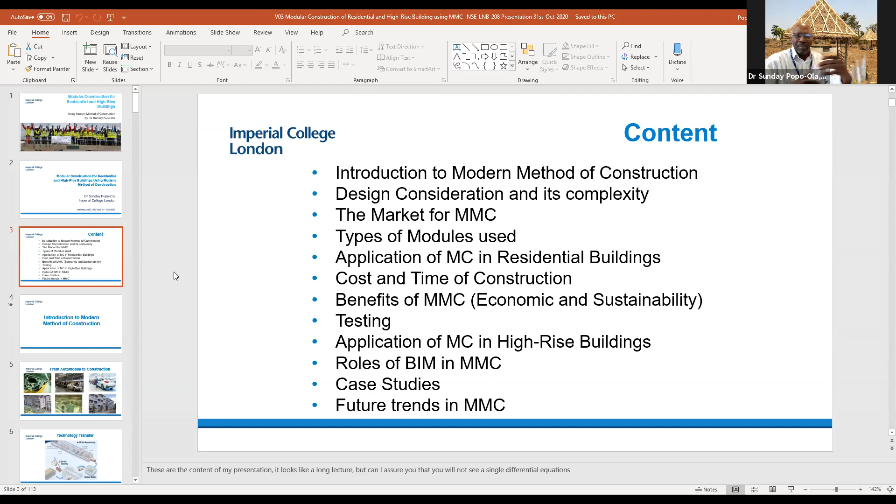As I've said, everything I've shown here, we don't just talk the talk, we walk the walk. I'm going to show you 3 or 4 case studies of where we've applied MMC to the work we've done, and then take you on a journey of where we need to see this in future - how MMC needs to grow to make sure we all benefit from it.

Take, for example, you want to buy a car.

Actually, MMC is not new. It's been used in other industries like the aeronautic industry and automobile industry. You want to buy a car, you don't go to Makola market to buy the tire, and you don't go to Computer Village to buy the dashboard. You go into the car show, you test it, you test drive it, and if it's what you want, you drive it away, and that's your car.

Why can't we get the construction industry into the same way? Why can't we build a factory and put all our modules, all our rooms, kitchen, everything into the factory, and then transport it to site, and by the time you know, a whole building is ready to go. Yeah, so that's what modern method of construction is all about.

We more or less transferred it from other engineering professions. So this is what I'm talking about. You come into the factory with all your raw materials. Normally, our raw materials go onto site. We bring them into the factory, and we do things to them. We cut them up, we put them into 2D panels, whatever. This is typical for housing.

And then we change them into 3D modules, and then they go on the back of the lorry - I don't like that word, but that's the word we use - and by the time you know, the building's been arranged on site. And if the site is not ready, you could actually store it in a place for a while, and then, just in time, transport to site. So that's what the technology is all about.

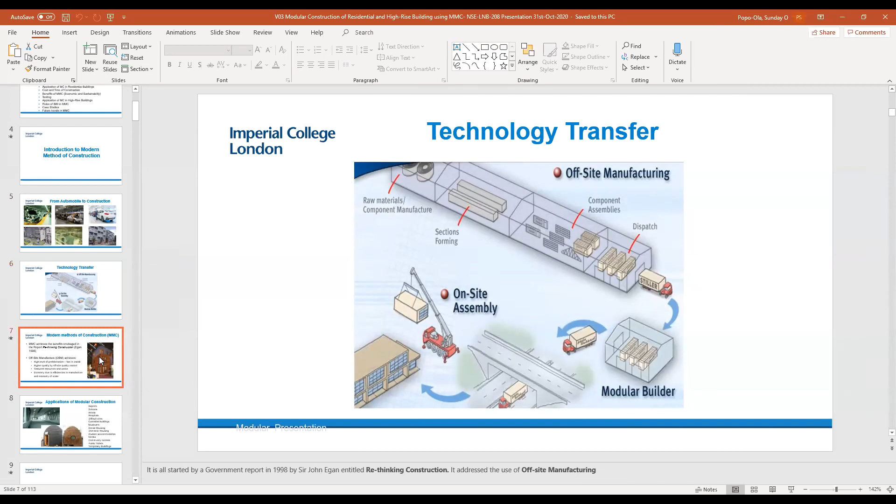And it all started many years ago, in 1998, when the UK government said to themselves, wait a minute, engineering and construction has been around for so long, but nothing has changed. We're still mixing mortar and block on site, we're still doing all this wet construction. Why can't we look at rethinking construction? And an elderly man called Sir John Egan was commissioned, and he set up a team. I did a lot of work for that team also, looking at rethinking construction.

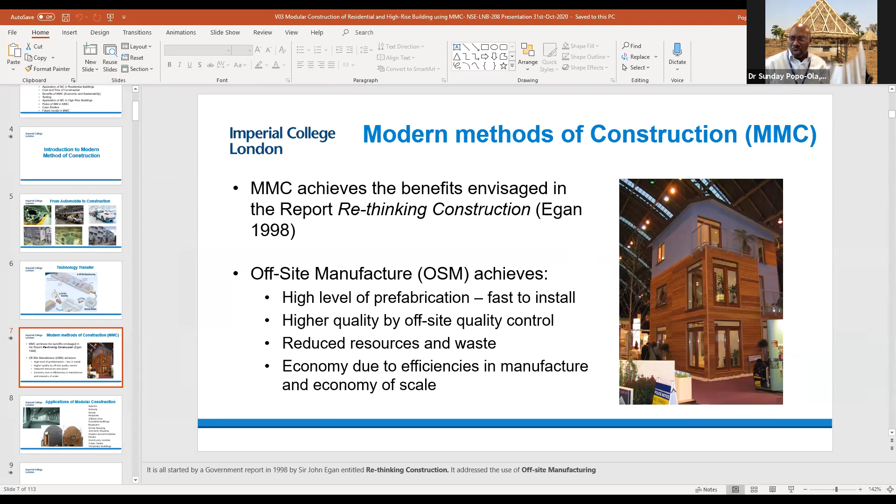And some of the things they came up with is, let's look at off-site manufacturing. Let's learn from the automobile industry, learn from the aeronautic industry, and see how we could put that into the construction industry. So: high level of prefabrication, fast to install, high quality of off-site control, reduced resources and waste, economy due to efficiency in manufacturing, and then capture this economy of scale. You have a factory building 50 cars, the same factory could be building 10,000 cars - you don't need anything more than that, you just need to work harder, spend more time, employ more people. Yeah, so that's the basis of modern method of construction, started from that report.

Design-wise, the size of the component is very important. When you're doing a build on site, as soon as the architect gives you the drawing, you don't worry about the design, about the size - you build whatever the architect gives you to do. With modern method of modular construction, you have to worry about the size of those components to make sure they fit in the factory, they fit on the lorry, and they have access to site.

The weight is also very important because you're going to transport this on the lorry, so you have to make sure it's not too heavy for that, and also for the lifting crane that's going to locate it. Accuracy is most important - I will show you a case study later on where accuracy tolerance was not considered properly, and the building had to stop after going to about 10, 15 stories. They had to stop, take everything down, and start again.

Time for erection - you have to plan that to make sure the foundation is ready before the modules start to arrive on site. The connection between the modules, and between the module and the core that's going to take all the lateral load. Health and safety, amazing - in this kind of construction we have a lot of free edge working at height, and health and safety is very important. One life lost is important to the construction industry.

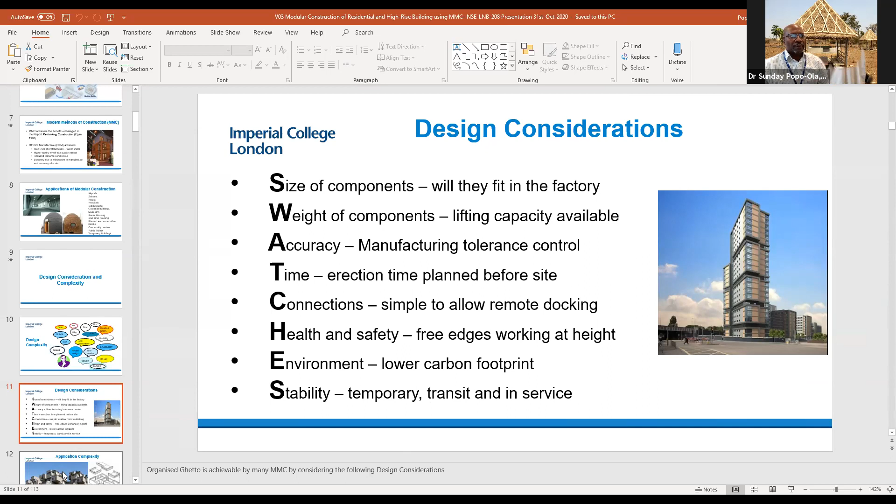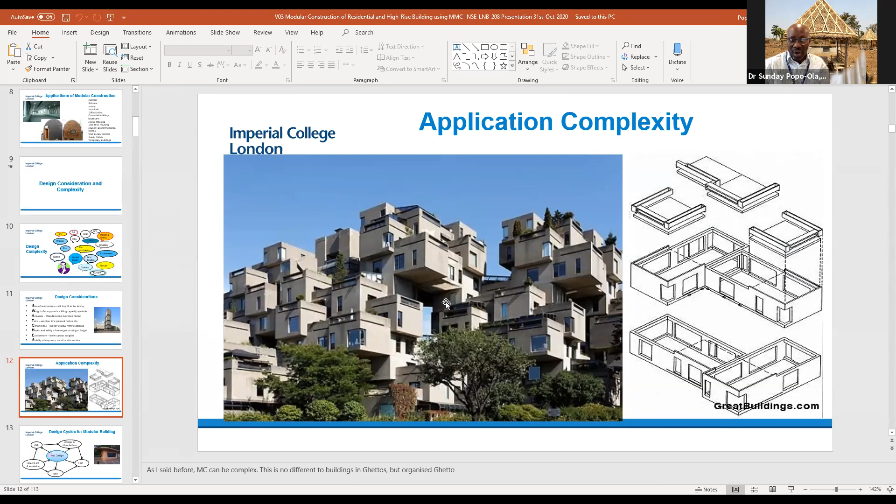Right, complexity - you could see the building there. It looked like one of those ghetto buildings in our local village, or even in Brazil and Mexico, all these buildings that have no order, no shape, they just put them together and they're functional. But this one, although it looks ghetto-ish, believe me it's very, very functional. It works - that's all modular blocks arranged in such a nice, fancy, complex way, and everybody is able to get into their building. That simplifies it. This is where modular comes in here.

So you take a pod, look at the design of it. How much is it going to cost? How long is it going to take to design it? How are we going to get it onto site? And who is going to use it or reuse it? After this one is used like a cafe that you could stop at in the park and get a drink or a little sandwich, whatever - but after that, can it be used somewhere else? These are all the things you need to consider. So that's just a little introduction to the complexity of the design using modular construction.

And why modular? Why can't we do things the way we've been doing before? As Einstein said, people are insane if they keep doing the same thing and expect a change. We cannot continue to do the same thing - things are moving on. So what's the market?

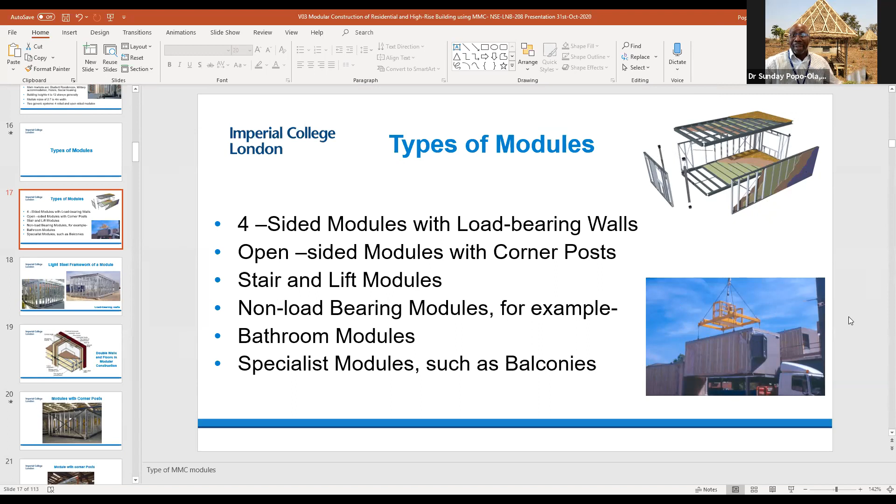Or you could have a staircase module, which is done again in the factory and transported to site. Or you could have a complete module, which has all been completed in the factory with load-bearing walls, load-bearing columns and beams. And then you could have a specialized module for balconies and things like that - I will show you a bit more about it as we go.

And in this light steel, they used to use them just for purlins, roof purlins, 30, 40 years ago - they had no other application for them. And then they realized, wait a minute, these guys are so strong, so reliable, so durable, we could use them for other things.

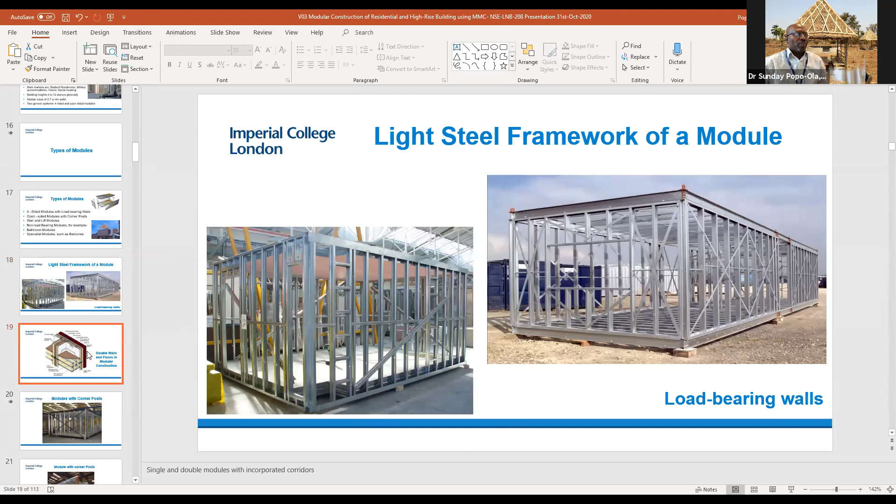One of the things people say about modular or MMC is that it's a bit of a waste of material. You can see here, this is a corner of a module, which has its floor, its roof panel, and its wall to the external, and then a wall to the next module. Then you have another module here, which has got its own wall again.

Although in a traditional method, you would not have two walls put together, it would just be one single wall. But believe me, the advantage you get from it far outweighs the cost and the material used. Because with this, it helps improve the sound insulation between the rooms, between the floors, the loss of heat to the external, as well as vibration.

So you can imagine people having a party here, and if you only have this one level, the people below will feel the vibration. So these are all the advantages of such a system.

And you have modules where it's got corners. So this guy here, they just have infill panels. They actually structurally do nothing. They're just there to fill the space and demarcate the space from this one to the next one.

So the working guys there are the column, the beam, and the brace member, just like a box. They're doing their work to make sure, like you all know, when you have a window or a rectangular pane, if you don't put the bracing in between, it won't transfer the load properly, and it won't be effective. So that's that there.

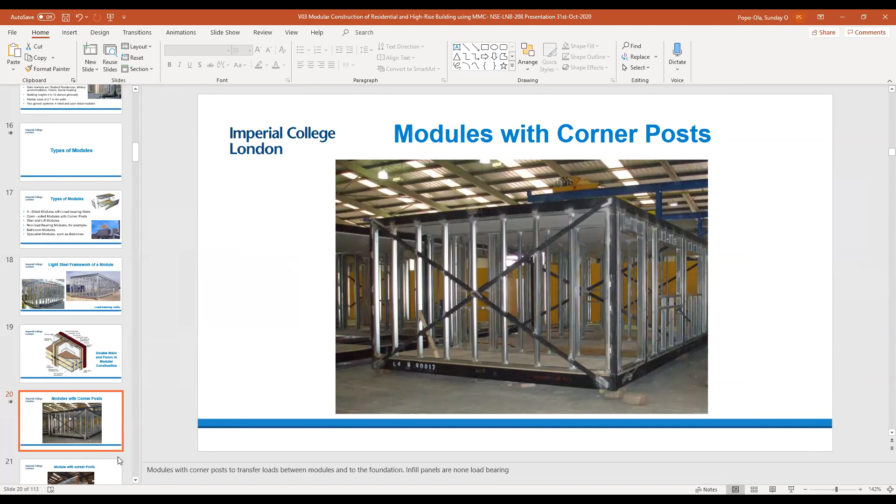And then you have some where you need to create a bigger room, so you can't have any wall on the side. Assuming this is a classroom and you have three of these together, the one in the middle will not have any walls in between because you want it open to the next one. So you could have that too, but the design of this is very, very important.

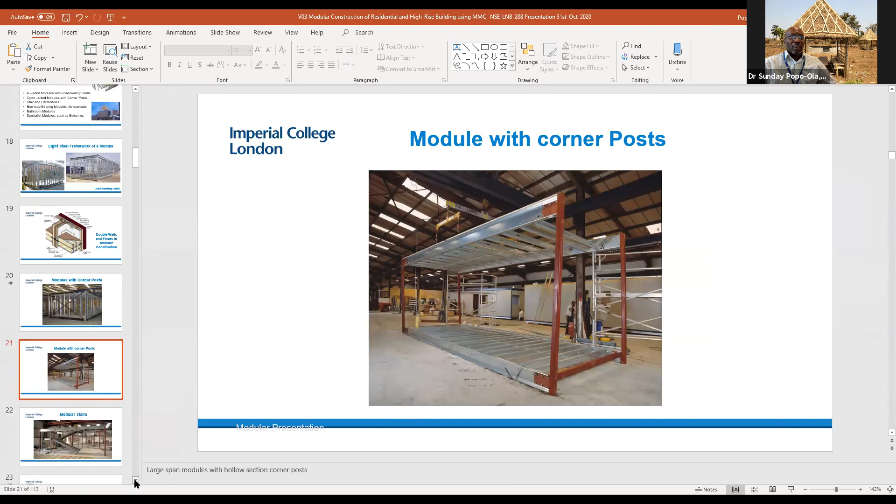And then you have some where you incorporate the staircase. Staircases are very, very funny elements in modular construction. It's not something you just put the timber mold in and cast the staircase on site.

You have to really, really plan this, because the next module is coming on top, and it's got its own floor as well, and this has got its roof. So the treads and risers of the staircase need to be planned to make sure they don't clash at that level.

Right, let's move on to application in residential. This is amazing. This started many years ago by a group of

A commercial or housing association called Peabody Trust came to us and said, listen, there's a lot of demand for housing in London, in the UK generally, but the rate of building is not fast enough, how can we deliver this? Based on Egan's report I showed you earlier, they put a factory together with Yorkon, the factory manufacturer at the time. Peabody are just the housing association, they provide housing for low-income people and all kinds of things.

So they put the money where their mouth is, and we created this apartment very close to central London, in a place called Angel, for those of you who know London well. And we were trying to maximize all the recommendations in Egan's report.

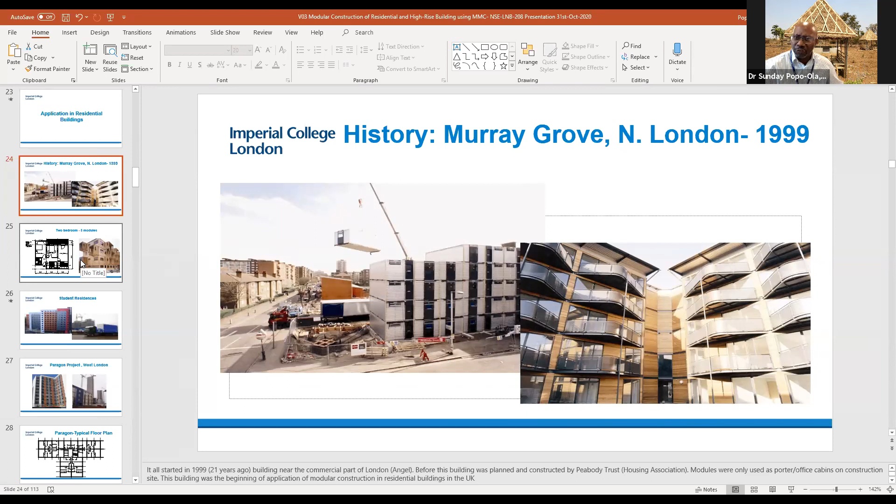And this is the inside of it. Looking inside, you definitely won't think these are made of boxes attached to each other. It's beautiful inside. And that set up a lot of people saying, wow, if you can achieve this, then we need to work a bit harder and achieve more. Then you have the timber people also coming along and doing their own thing.

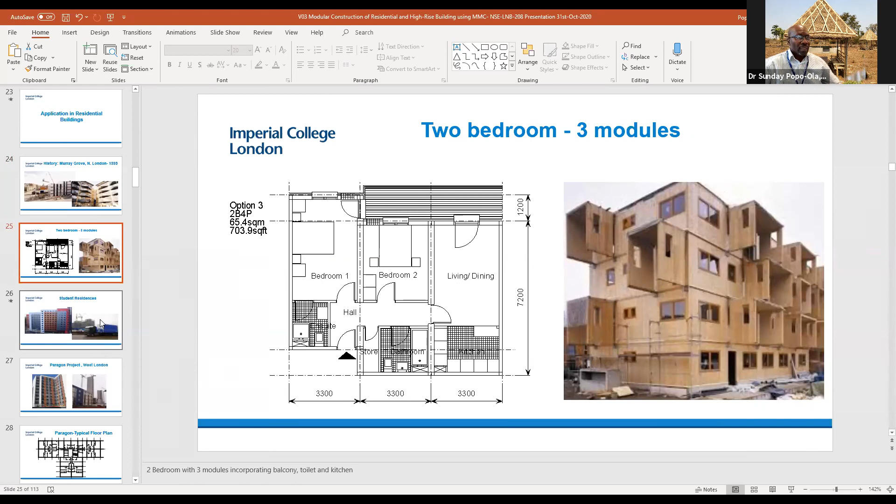So this is a typical 2-bedroom house, and all you need is 3 modules. There's one module here which incorporates the balcony. There's another module here which incorporates the kitchen and the bathroom or storeroom. And then the last module, again, another bedroom and the toilets and baths. So everything could be incorporated within the module, and they just come onto site and fit it together, with a door flowing through all 3 modules. And then with that, you go up and start applying it.

So this is a company called Unite. They realized there's a niche for student accommodation—an amazing niche for it. I don't know about now that we have Corona with us, most students are working from home now. So they saw that and started building student accommodation everywhere. The big thing about Unite is they're not just manufacturing the module, they also have a contracting arm of their company. So they manufacture the module and then pass it on to their own contractor to build the building.

This is about a 12-story student accommodation, the one I showed you earlier. It's called Paragon, we did a lot of fantastic work here. This was done by a modular company in Ireland. They put this project together, and you could see the concrete core already on site rise, boom, 12, 13 stories. Before the module starts to arrive, the concrete core is already there. And this is a typical plan for that particular building.

And you could just see the line of the modules right here—that's the lines of the module, where all those lines are. And these are the modules which incorporate the corridor, one room on the right, one room on the left, and the corridor in between. And this is typical of the module being lifted onto site. You could see, I think I showed the skeleton of this module earlier.

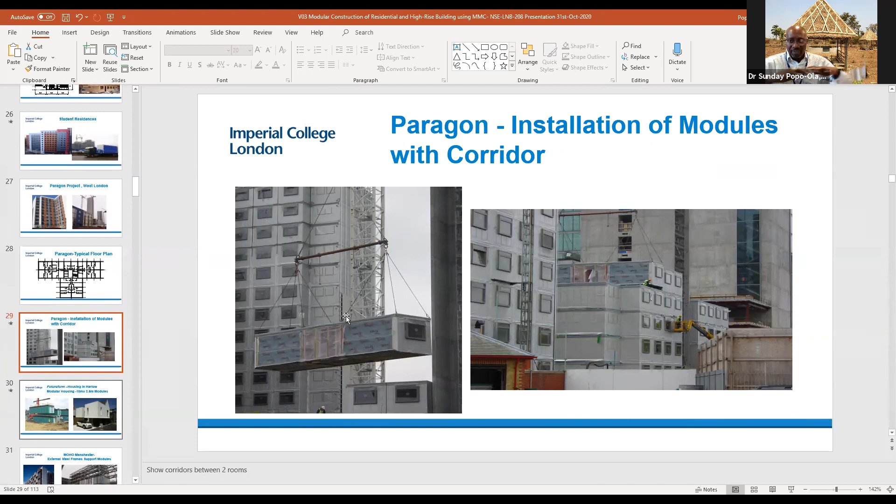Now the window is being put on, some of the facade element is being put on, and it's being lifted. Lifting is also very important—you have to think of the wind load and the rain and all kinds of things going on to the side before you lift, and you have to make sure you lift in such a way that the module doesn't get damaged. So you can see this one has an 8-point lifting point on this module to make sure it keeps flat and lifts very equally.

And who says modular construction is just boxes? This is a private house somewhere in Harlow, in West London. And although it comes in boxes as you could see here, by the time it finishes, amazing, amazing, good looking with a nice car, and nobody will be able to tell that this is made of those boxes.

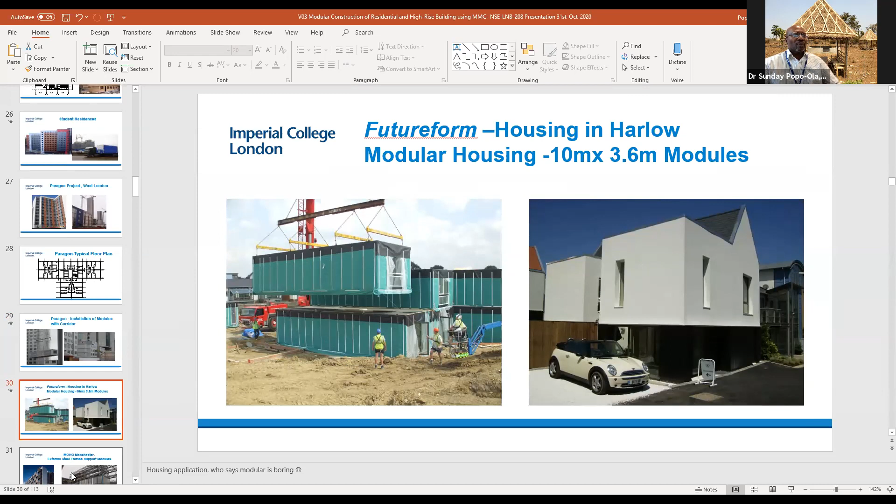And then you have some more where you have what I call plug and play. I always argue with architects and engineers that it's a little bit of a waste of materials there. You have your steel structures already in there, and you just bring your module and plug them in—plug and play. It's an experimental design that we tried. It worked, but I think not many people have tried that for a while now because of this double handling of materials. You have a steel there, you have a column, you have a beam, and then you have the same thing on the module itself.

And then application in schools—this is a big thing because in the year 2005 to 2010, the UK government decided to rebuild all secondary schools and build new ones they call academy colleges, like technical schools in Nigeria. And to be able to build them fast and efficient, they have to use this method. So a lot of these schools we worked on used modern methods, using prefabrication, using the modular method. And some of these schools could go up within a week because everything is done off-site.

You just come to site and attach them together. While they're building offsite, the foundation is being prepared. And the foundation is also very, very little. It's not very big at all.

And then you have other applications, like this one in East London, where the ground floor is made of steel structures, and then the modules are assembled on top of it. These two structures there are a lift core or staircase to resist wind load.

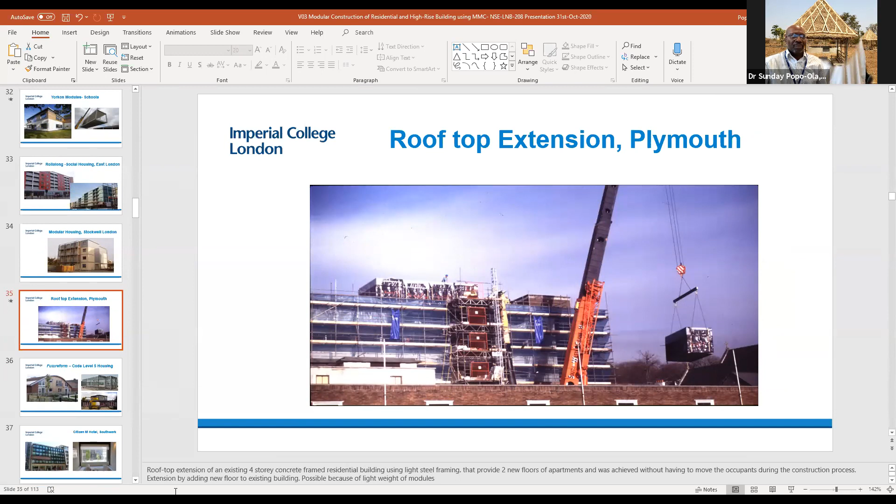Again, more of this plug and play, as I said earlier, where the kitchen as well as the bathroom module come in 3D, while everything else comes in 2D panels and is assembled on site. Some people use this especially when the site constraint is so bad you can't get a big lorry onto the site - so you bring the members in 2D panels and quickly put them together. But the smaller modules, like the kitchen and toilet, could come in 3D. Each time you get to the floor area, you put the next one on. So again, it's a quick way of building.

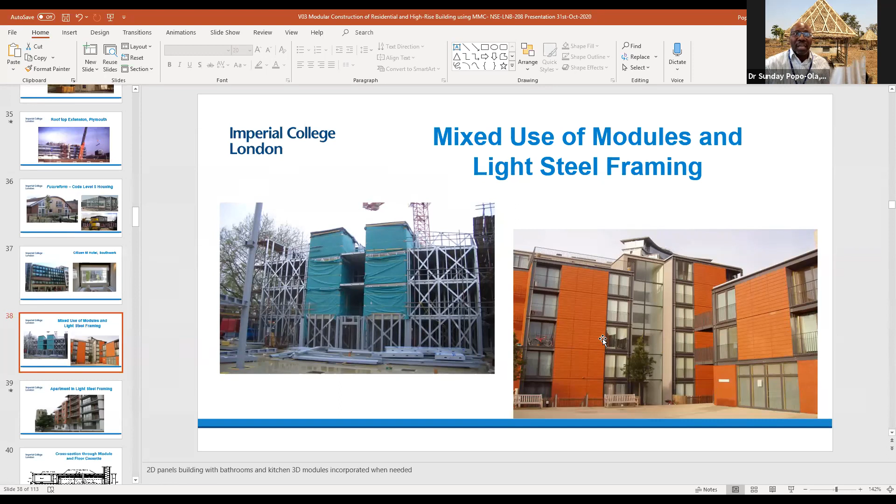This is what's finished at the end - this is the same building, and this is what it looks like when it's finished. And again, in apartments, the same thing - you could either have a module put together, or you could have a 2D panel put together. But when you're looking at them at the end, you'd think these things are done by traditional methods, and they go up so fast you won't believe it.

You see the land one day with nothing, and within a week or two, the whole building is done. People thought, what's going on there? Is this magic or what? But that's it, that's what we're doing at the moment.

And I told you earlier, the use of material is very important in these things, because these materials are very tiny in thickness - 1 millimeter, 2 millimeters, 1.6 millimeters in the floor system, and then another one which is 2 millimeters. They're very thin compared to thick concrete or thick timber, 2 inch, 3 inch timber. And the way you connect them together makes them look so efficient.

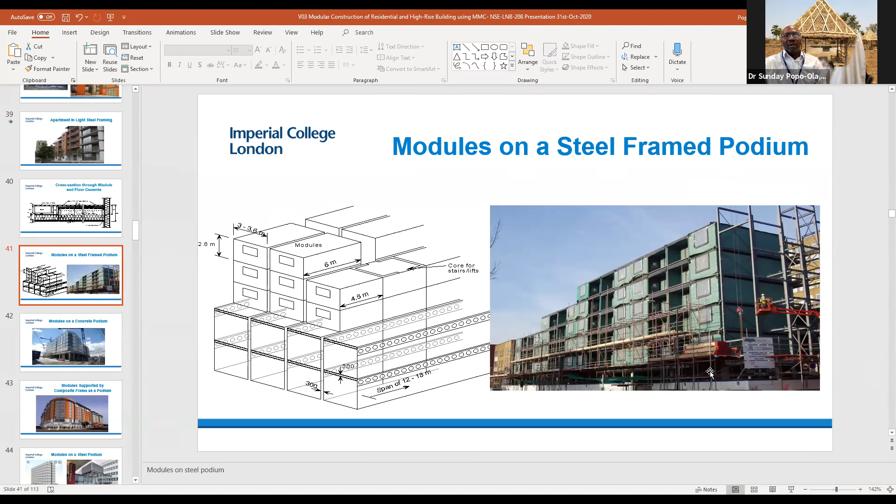They work very, very well. This is the same building I showed you earlier, showing how the ground floor is made of hot rolled steel section and then the module on top. This particular one was done in Manchester. This is a student accommodation. It was massive, like a rectangular shape with a big courtyard in the middle.

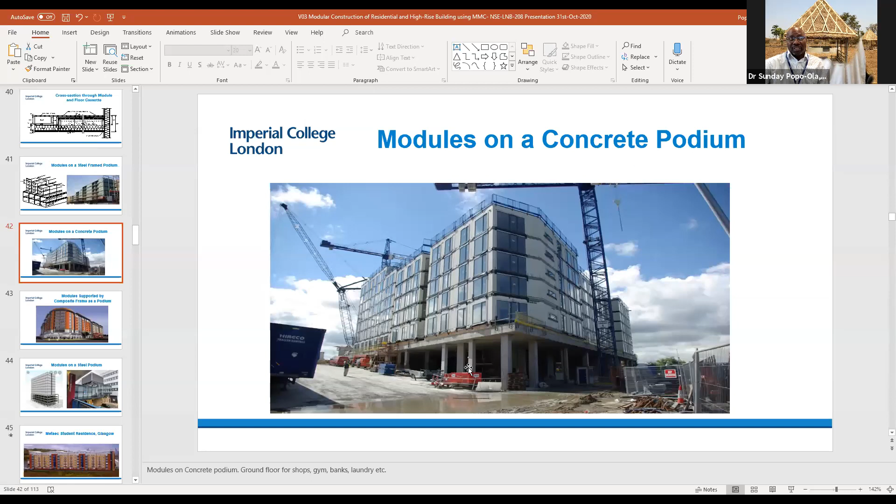Right, how much does it cost? Well, I've described some timing and things like that with you just now, but time and cost is very important to construction. So we need to review this, and it's not just cost, it's a whole life cost. Modular construction is so fantastic that there is hardly any callback within a year or two. Most traditional building, within 6 months, something is leaking, a pipe is busted or something happened and they have to come back. With modular, everything is tested off-site to make sure it's all working.

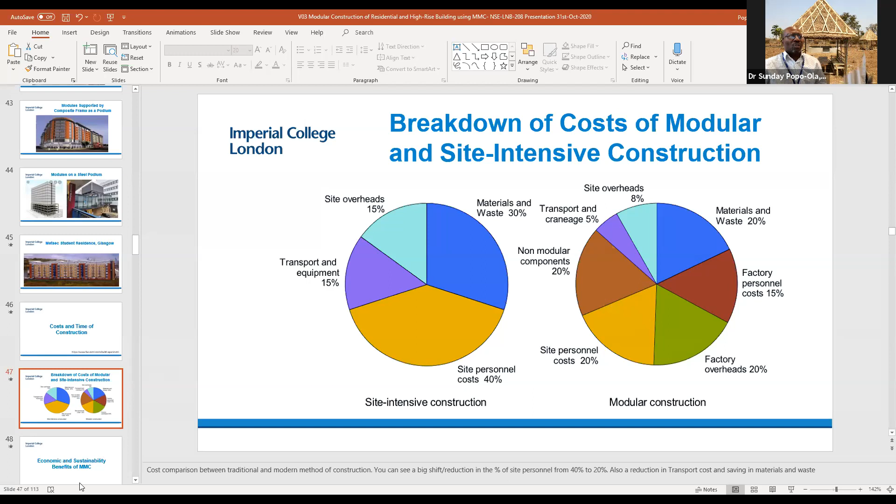Now, let's look at the economic and sustainable benefit of modern method of construction. Some of these figures I'm going to be giving you here didn't just pop out of the air. We've done a lot of research over time to come up with these figures.

Speed of construction, you can't beat it. As I've said to you earlier, before the building is finished, people are already occupying it. You're already cutting down, instead of a 2 year program, you cut it down to 6 months, and you've got 18 months of rent already going on as soon as it's finished. So you reduce your construction time quite a lot.

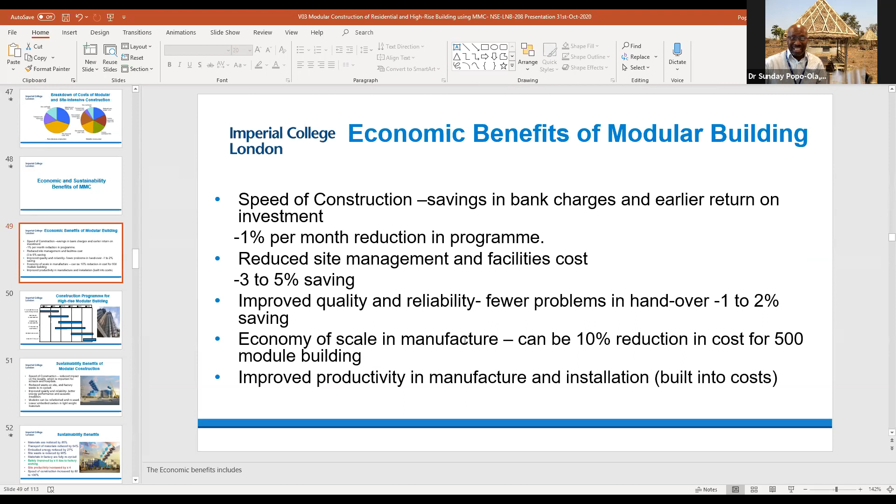Management and facility cost is also reduced. Quality goes up fantastically. Economic of scale, as I said to you, if you have a niche market and you know you can produce 500 instead of 50 module, go for it. Economic of scale works in your favor, and it improves productivity and installation. So you have to train your workmen to be able to do this very well.

And as a result of that, your speed of construction goes up, you reduce the site waste, you improve quality, and module can also be reused.

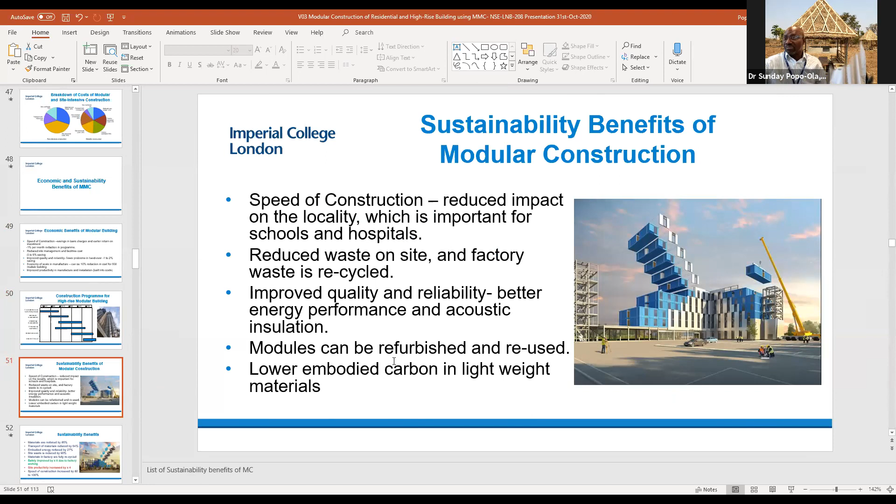If you think, oh, I'm fed up with this module, you could replace it, because the way they are put together, they can be disconnected and another module put in place.

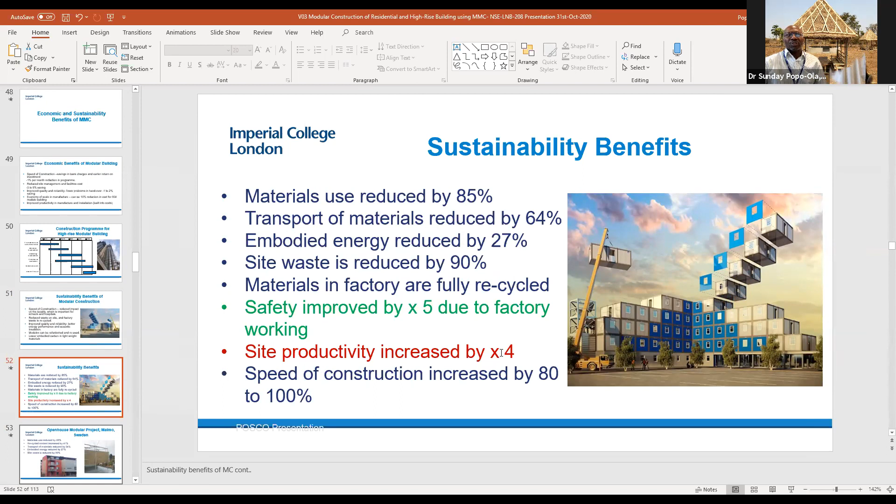This is just a summary of some of the research we carried out. Look at embodied energy, the reduction in embodied energy, something that contributes to our ozone layer. You've reduced that. Site waste reduced by 90%. But the most important for me is safety. Safety improved by 5 times compared to safety on site, and site productivity also increased by 4 times. So you can't compare it otherwise.

Before all this started, it's not like we do in some countries where you just go along and throw an arrow and all that. We did a lot of testing, a lot of research, to make sure this system would work. Then we set up a body that will certify all the new systems coming to the market, that will check them, test them, to make sure they will work. So we don't want to put a system out there and then within 6 months find that it collapses because it hasn't been checked properly and tested.

Myself and many other people at Imperial College did a lot of testing for this company to check the buckling capacity of these members, the spanning capability of these members, and the connections of these members.

I published so many books, I haven't got any in front of me at the moment, that tell you how these buildings are put together, the capacity of all the members being used depending on their thickness, and how you could put them together. So we did all of that, and that resulted in a lot of publications, both on the strength of this material, the durability of it, and the way you put them together.

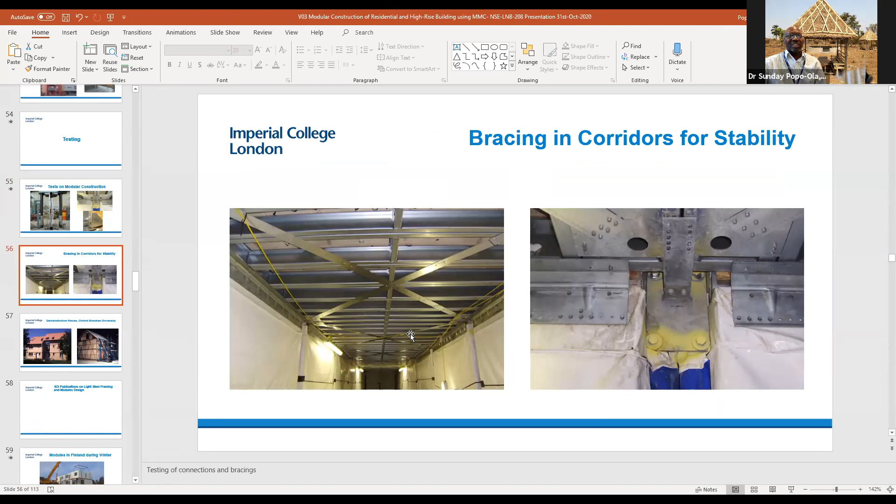So this is a building here showing, or test building showing, the connections on the ground, which is all going to be covered up afterward, so you won't see it. And then we did a prototype. Again, these are 2D testing here, plain 2D dimension testing.

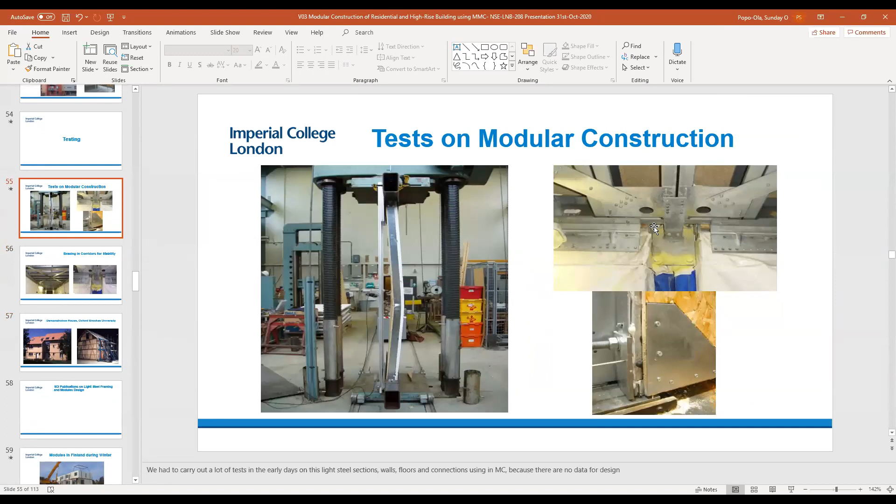These were all done and tested for over 6 months. After that, we thought, okay fine, it works, and the bit that doesn't work, we improve it. Then Oxford Brookes University commissioned us to build one of those buildings as a prototype on their campus. So one side of it is the chancellor, and the other side is a student living in there. And believe me, I've seen buildings being monitored, I've never seen anything like this.

Everything's been there - floor insulation, sound insulation, you name it. We have it on this building here, and it's still there, working and doing very well.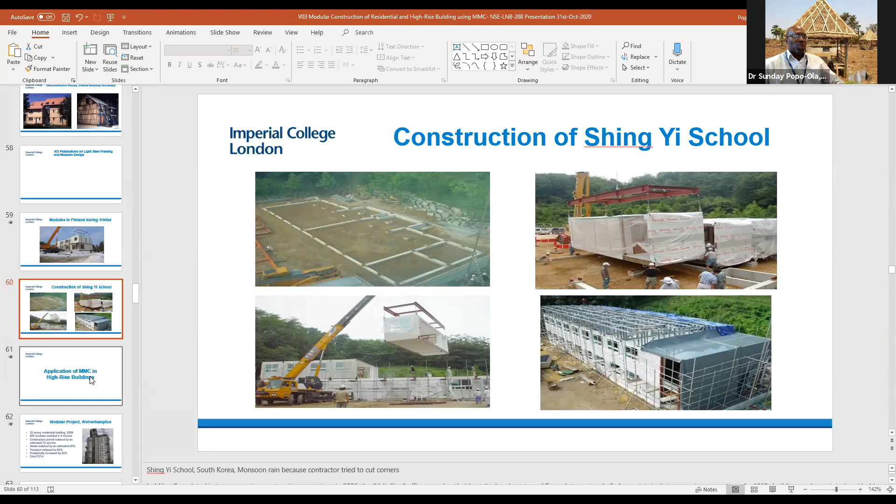They called me at 3 o'clock in the morning and said, Dr. Popo-Ola, we have a problem on site. I said, what's your problem? It's raining, and Korea has monsoon rain - when it starts to pour, it really pours. So that taught them a lesson. They were very lucky - the air conditioning and lighting were not too damaged, they were able to rescue it. So you should always follow specification.

Now let's move on to high-rise. This is where the real challenge comes for modern methods of construction, or modular construction.

This is a building in Wolverhampton. It was the tallest for many years, 25 stories, 825 modules, and everything was put together in 6 months. Can you imagine trying to construct that with traditional methods in 6 months? Impossible. Then erect everything in 12 months on site.

These are just some statistics of how much safety improved and how much was saved because of these methods. It cost 37 million pounds - that's about what one senator earns in Nigeria, isn't it? Can you imagine if all senators used their salary for the year to build one of these? The country would be beautiful.

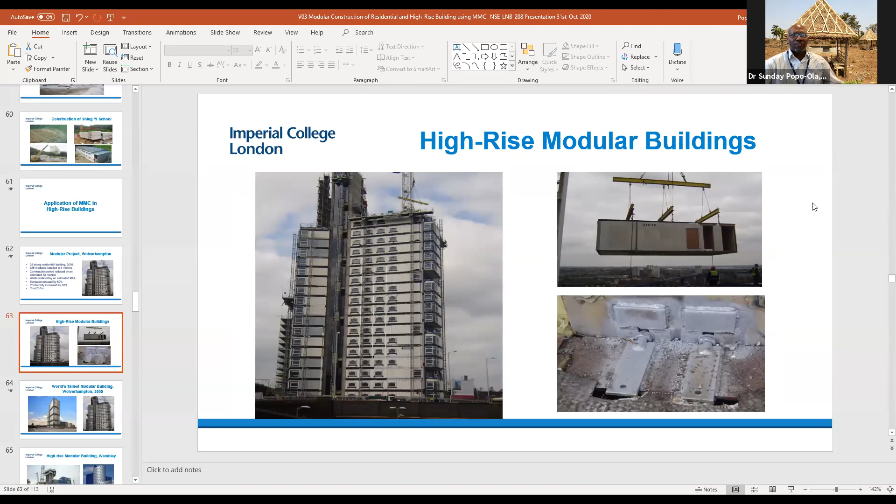This shows some of the elements, connections, and lifting involved in this building. The core goes up much faster before the modules start to arrive on site, and this is what it looks like when finished. Then we have other companies - it was the tallest for a while, from 2009 to about 2012, and then other buildings came along.

This is another one by Unite, the company I told you earlier has both a modular factory and a contracting firm. This is one of their student accommodation buildings near Wembley Stadium, very close by. From here, students could watch football for free if you're standing on top every weekend.

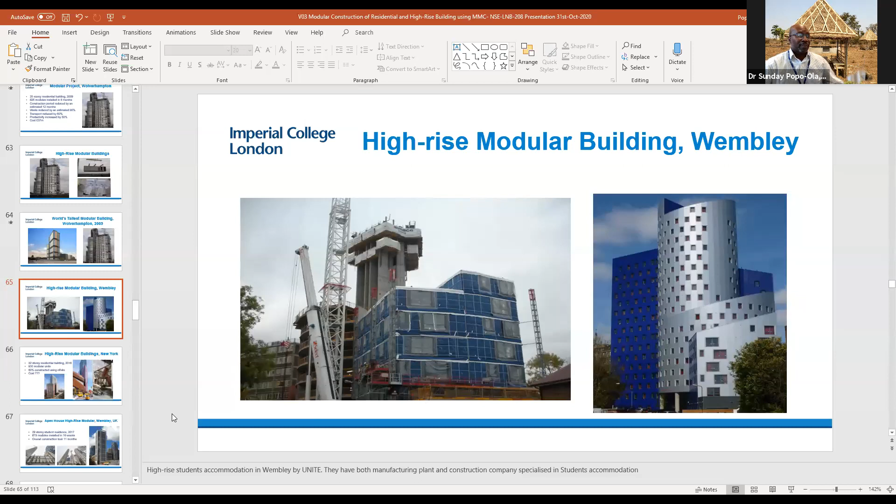And then we have this one in New York. This is the one I mentioned where, when the tolerance isn't done properly, it could cause problems. This building started at 32 stories - the other ones were 27 and 25. When it started going up, the building began to misalign. They were not able to connect the modules anymore because there wasn't enough tolerance within the joints. But now it's completed - I don't know whether it belongs to President Trump or not, but it's not completed and it's not being used.

Then you have another one in Wembley. I don't know if anybody's been to a restaurant called Mama Calabar in Wembley, those of you who live in London. This is the site of Mama Calabar. It used to be on the 3rd floor of the old building, and we used to have some good egusi and ogbono soup there for many years. Now it's been taken down, and they've put apartments and student accommodation there instead.

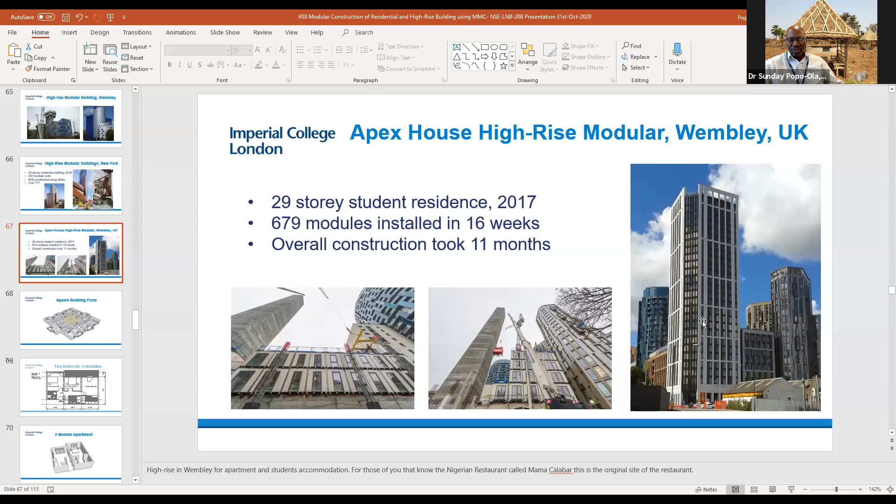A 29-story building built in 16 weeks, with construction done in 11 months. There's no way you could achieve that with traditional methods. Here's the typical floor system, with easy access from the core into each flat or room.

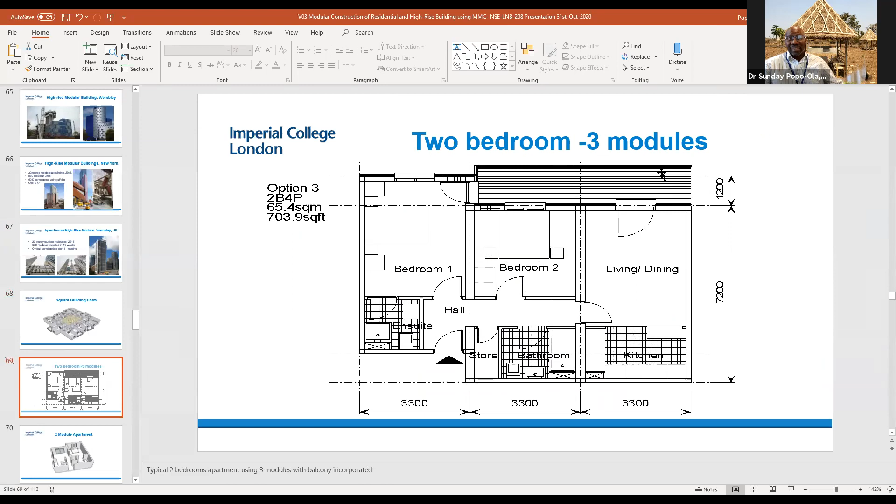As I showed you earlier, this is a typical 2-bedroom house made of 3 modules. You have your living room in one with the kitchen, your bedroom 1 with the bathroom and toilet, and bedroom 2, with an incorporated corridor and balconies. This is a 2-module version of the same thing.

A lot of people living there now are having a benefit of it, now that Corona is locking all of us into our homes to do our work. So they could still go to the office because their office is right there and their home is just across the corner.

Whenever I take visitors from other countries to this apartment, there's a lady here that always allows me to come in so that I'm not just doing the talking. I'm actually showing them the demarcation between the home office and the home and the office.

And then we have other facilities where you have what we call the hybrid, the module and the frame. I think I showed you that earlier. I think there's too much double handling here, but for some reason these are designed for people that want to take their module out and locate it somewhere else.

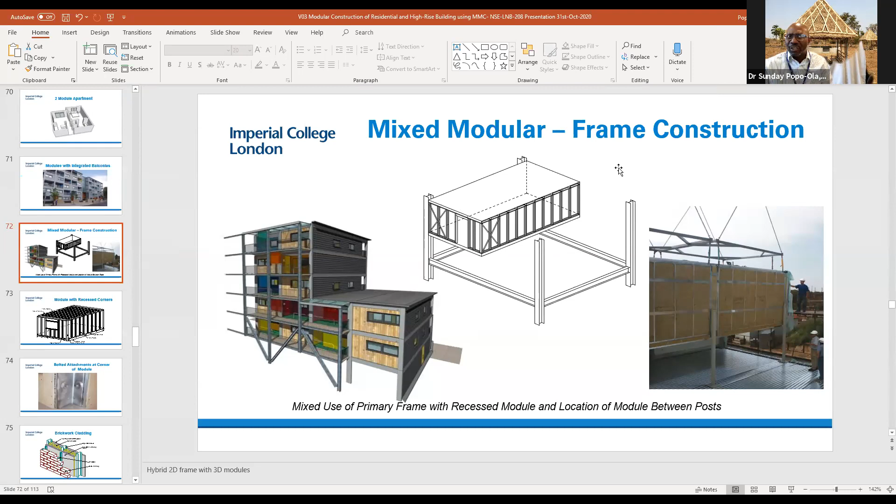And another thing - if you're fed up of living in London because the tax is too high or the transport system is too costly, and you want to move to Birmingham, you could take your module away without destroying the structure of the building and go plug it in somewhere else.

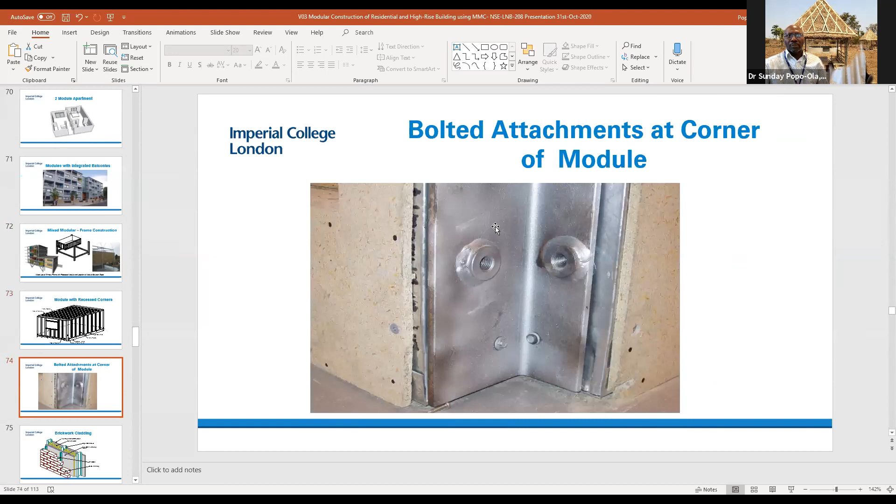And this is what those modules look like. They have a corner section like this that are attached to the column on those frames. And again, they can be clad anyhow - they could have a traditional brick clad, or a metallic modern brick clad.

And this is the application of a typical metallic clad for an office somewhere in Wales, I believe. And looking at that, you would not think they're made of modules.

As I've said earlier, I'll emphasize again - this shows you double walls and double floors, but believe me, it is worth it. It's actually very efficient and it's cost-safe as well.

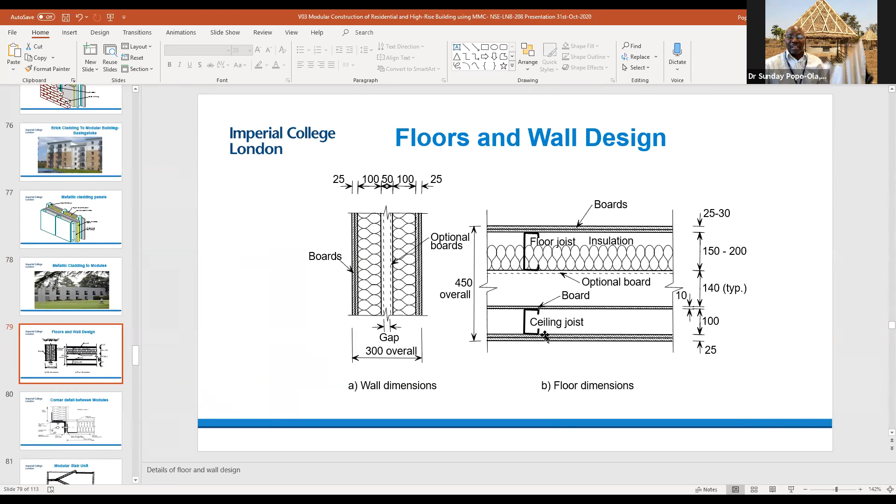And again, another corner example. This is the problem the New York building had - they didn't have enough location holes in the corners, enough tolerance for the bolts.

So as you're building up, you get to 10 floors, you're definitely going to get some sway in alignment. So if your hole is big enough, you should still be able to put your nuts and screws in it. But they didn't do that.

And the staircase, as I've said to you before - we have this issue where the floor of one module and the roof and ceiling of another need to come together to form that step. And if it's not done properly, you will not get that to work.

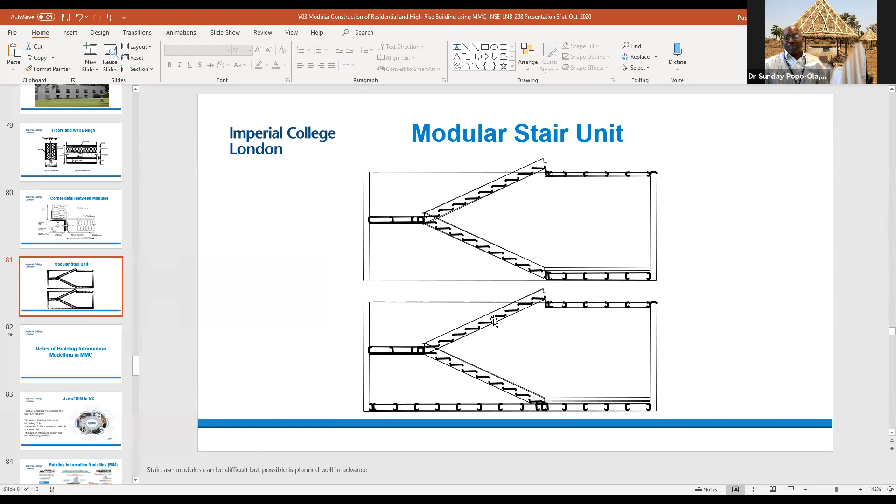So a lot of people get caught out there, to the extent they have to then build another step because the structure isn't done properly.

Building Information Modeling - I'm sure you've all heard of this, and I hope Nigeria is also turning into this. It's well used in the UK and Europe, whereby everybody - and I mean everybody, architects, engineers, detailers, fabricators, contractors, project manager - comes together and they work jointly.

They're all reading from the same drawing, and if there's going to be any clash in anything, they can see it before they even start work on site.

So this, for me, has a fantastic application in modular construction. We've been using that to design some of the things we do, to synergize between all the professionals. But the market for BIM is so massive.

It's just amazing - everybody wants to get into it, every small company and big company. The leader in this is Autodesk, and there are so many other companies creating software, creating methods in which you can combine all of these things together.

My problem with them, which I always say to them, is you guys need to sit together and come up with a code that they all have to comply with. But still some of their software are not compatible with each other, so how will I be able to work with a different person using a different software if I can't transfer my file easily?

If I can't transfer my file together easily, this is something they need to take account of.

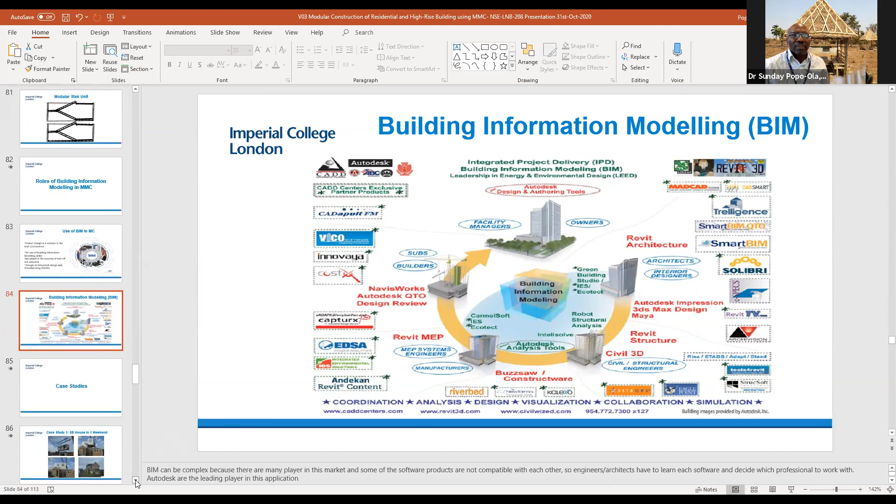Right, I'm almost there - this is going on to the case studies now. I'm going to go through this very quickly.

Apart from the Murray Grove house I showed you earlier, where the cladding was taken off because it was falling off, this is one of the first buildings we built. And apart from the Oxford Brookes one, this is actually dated well before that, where we did a module.

There's a factory not far from the start of this building, and we erected this building in one weekend. This is a 3-bedroom house, built in one weekend. And I mean, they started serving food and people were sleeping in it after one weekend, right?

So it's just to show you how quickly this thing goes up. And this is the one in Korea, which I again mentioned to you. Korea is very interesting, Korea is like Nigeria - things can be very slow, and a bit of corruption is involved. I wasn't part of it, but I could see it.

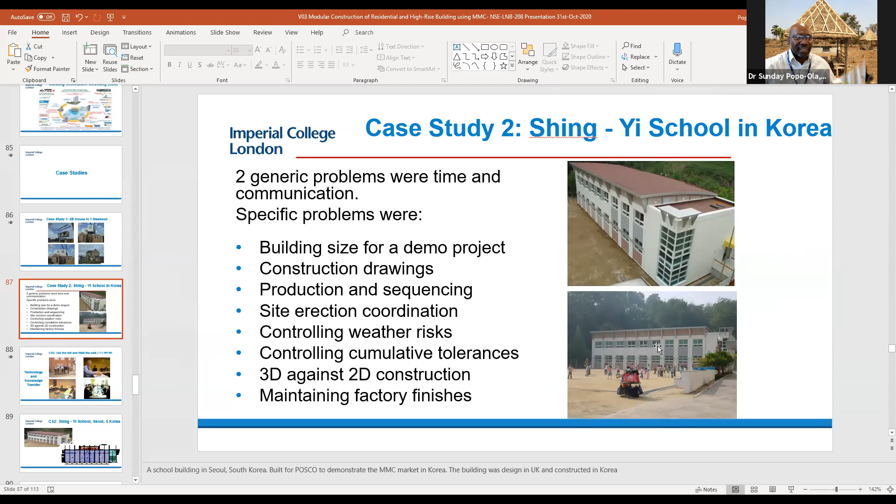This is a school located where the population is growing. People need more school space, and they can extend the school building, which is about here. So they came to us, and also the company called POSCO, the biggest steel manufacturer in South Korea. They wanted to go into the market of modular construction, and they came to the UK instead of Japan, but we know why that is. They came to the UK and we designed and built a school for them.

But before that, we spent about 2 years - this is where the correlation with Nigeria comes in. We spent about 2 years talking about it. This guy would come to London, UK, and I'd take them around to places. We'd go to Korea, we'd have meetings.

This is one of my colleagues here, Professor Mark Lawson. The final meeting we had was with the school principal, because she just didn't see it - why we want to take the football ground and put a building on when we could add a building on top. So we had to convince her, and it took a lot of people to convince her, but it worked.

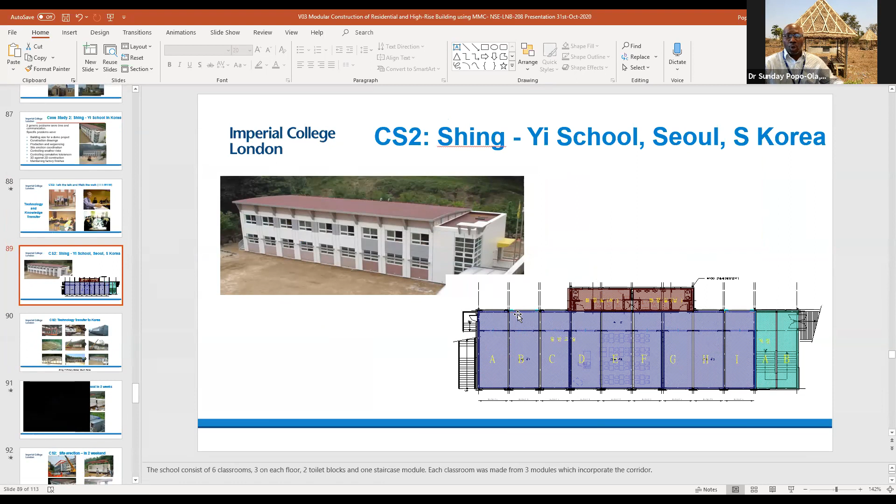What we did is we designed everything in the UK. All the modules were designed in the UK. We have an architect, engineer, myself, and each classroom has three modules - 6 classrooms, 3 on the ground floor, 3 on the top floor. We have a toilet module, and a staircase module. So everything - the corridor is fitted within the classroom module. And this is what happened when you've done that.

They quickly manufactured this because Korea had 6 car manufacturing companies, so experience of working in the factory - they're very, very used to it, they know all about it, so we didn't have to teach them anything. So they quickly manufactured this module while the site work was going on. The module and roof sections in 2D, the module in 3D, covered them up and erected them within - I think this was 2 weeks, and we were working weekends as well.

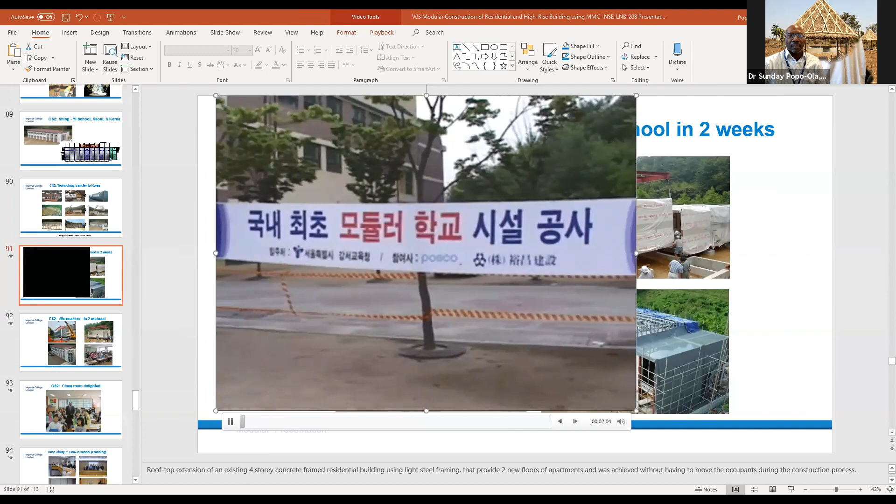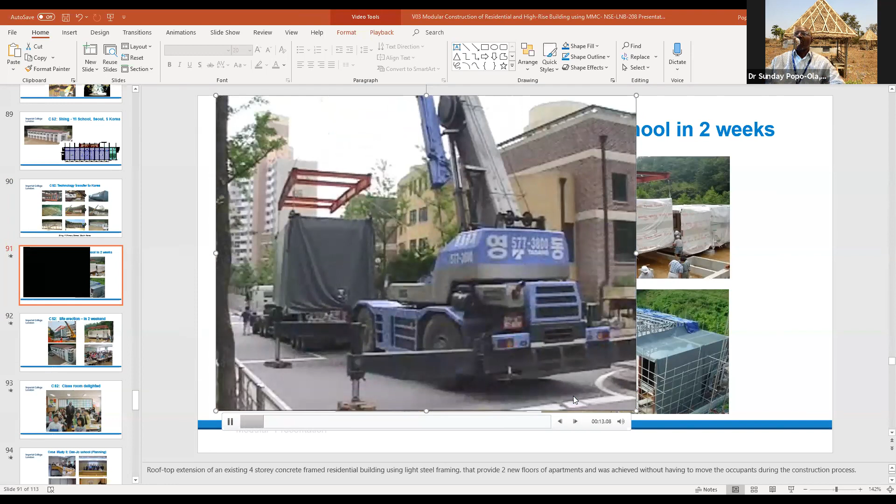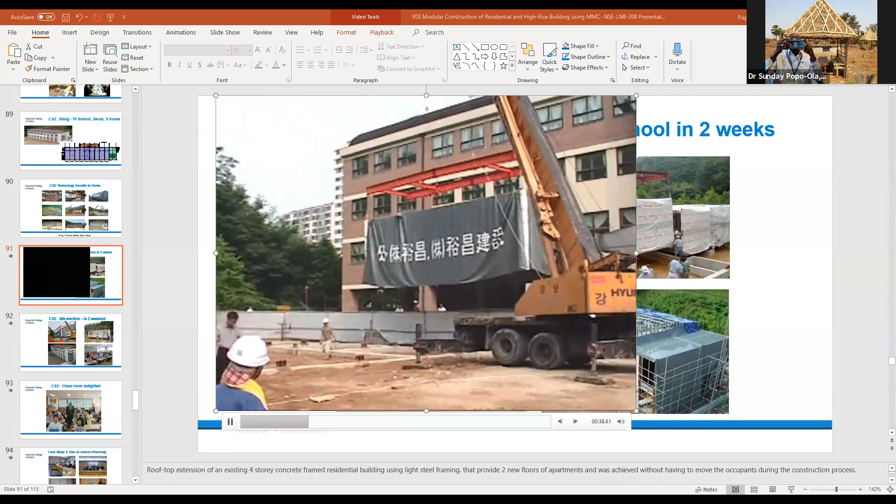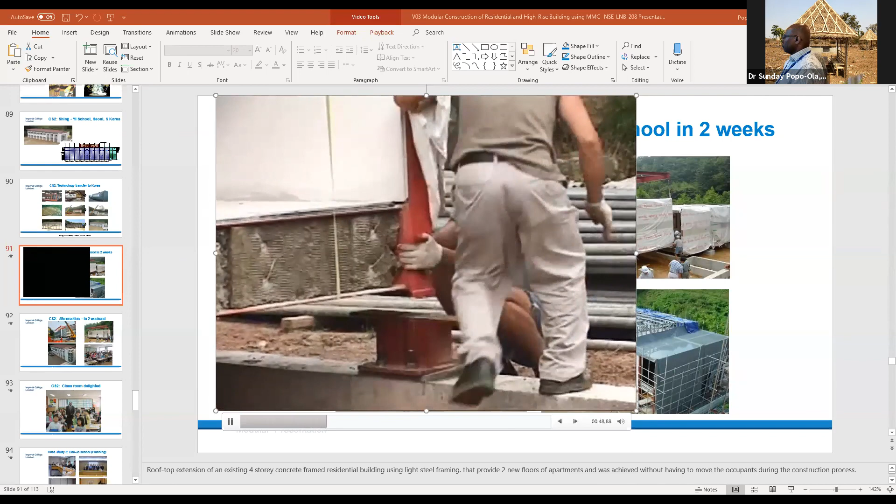So I'm going to show you a quick video of the construction. I'm going to speed this up a bit.

Thank you very much for that. And this is the building during construction. But the bit I enjoy very much is when I went back in there and they're telling me - this is one of the engineers that worked on this building, the student. They were all so excited.

But he then opened up and said, 'Yes, I know you,' and he described how I came to their school, and he even had some of these pictures as well. He was so pleased to say that after so many years, from 2009 to now coming to Imperial College to study, he was able to link up with the same person. Isn't that amazing? Isn't that wonderful? So for me, that's what wakes me up in the morning - to know that a young person like that could gain so much from such a thing.

Right, so the Korean people, they move on. While we're still trying to convince a lot of people in Europe, they move on. And we have other meetings. Now with the big players, they love their food.

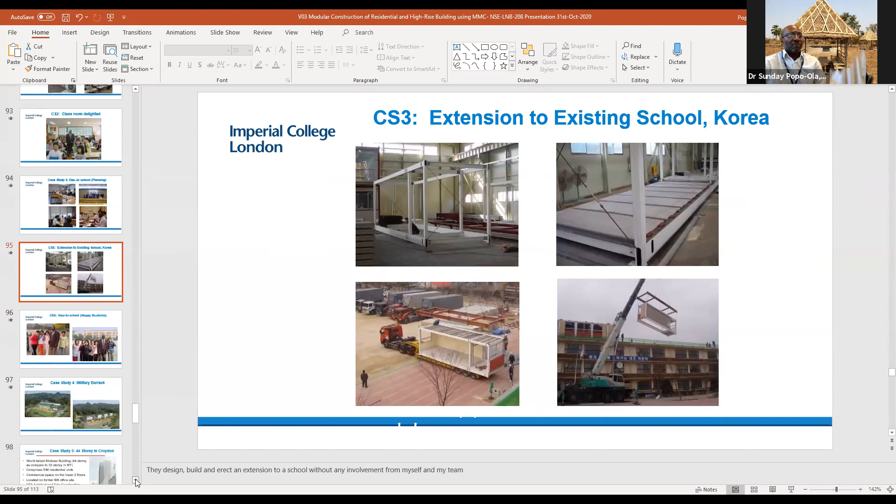I went back again, and you could see how beautiful, how wonderful the students were, so pleased to see me again. But the Koreans, I love them - South Korean, not the North one.

Despite doing all of that and trying to get more knowledge in modular, they're thinking that one day South and North Korea will combine. As a result, they are building modular housing along the border. They don't care whether North Korea blows them up or not. They're building modular because when they combine eventually, it's like East and West Berlin becoming German - they want those people in North Korea to have the same standard of living as the South Koreans.

So these houses here, made of modular, they're sitting down there empty, and I've seen them. So these are legacy as far as I see. They're setting a good legacy.

This is my latest project, and it's almost finished. This is in Croydon. This is the tallest one in the world now, apart from one coming up in China, which isn't quite completed yet. It's 44 stories. I took my students there just before Corona started last year, and it's beautiful - how quickly they went up.

Comprises of 546 modules or residents, amazing connections and everything, located very close to the train station. It was an old British rail office site that was taken down. HTA - I've done a lot of work with HTA - and Tide Construction are the contractor on these. And Vision, which I showed you earlier, Vision Modular, they're the one that manufacture all the modules in their factory on the west coast of England.

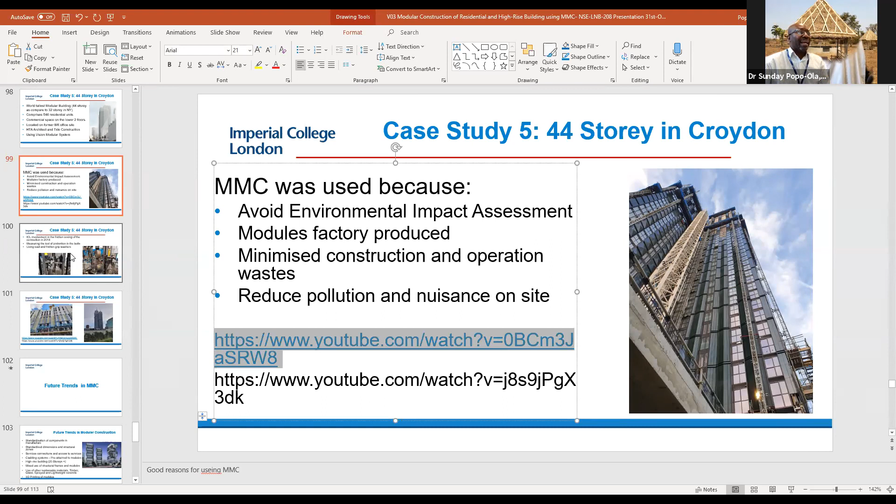With that particular building, my involvement, apart from design of the module, is the connections. Because the building is so tall, and also London has been experiencing a few earthquake tremors - not real earthquakes, but tremors - they reckon they want a connection that will make sure the building does not get subjected to earthquake damage, and if it does, it will be able to resist the earthquake.

So my involvement here was this connection, to test it and make sure that with a little movement from earthquake, the connection will continue to stay together. It will not slip. We tested about 5 or 6 different grip washers to make sure this connection will stay, and if it does move, it will only move within the allowable movement.

So that's my involvement. And they were very pleased, because sometimes you don't know if you've designed over it with too many safety factors - it's never going to happen. We don't know if this is going to happen, but they spent some beautiful money at Imperial College to check this out, to make sure it doesn't happen.

So this is the final building. Like you see, it's almost completed there. I'm coming to the end now.

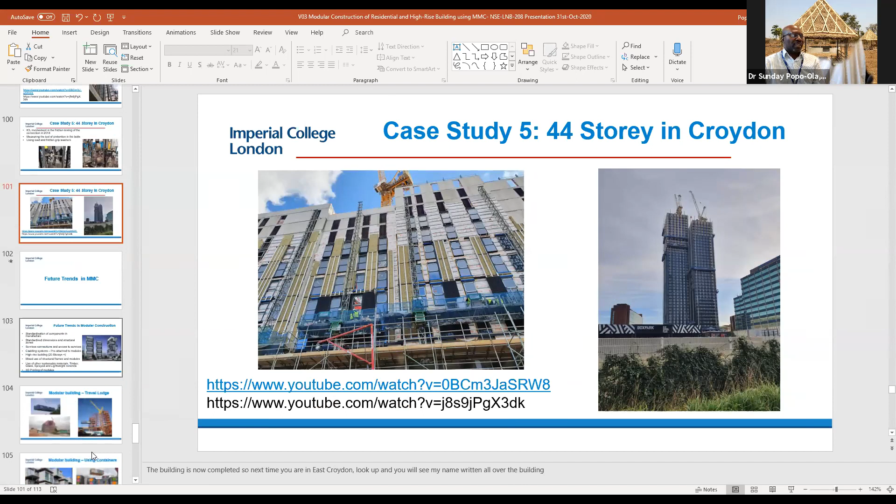Right, future trend. With all these things, we have to change, we have to move on. As I said to you earlier, if you keep doing the same thing and you don't check around you and progress, you will never get new results. So you have to think of things you need to do. So in our case, modular trends - future trend.

We need to standardize things a bit more. Dimensional, structural zones - agree that yes, your floor will be this much if you use this much material. The services connection, the cladding type, whether you pre-attach it or you attach it on site, and how high this building are gonna go. What's the limit?

There's a lot of tall buildings. Burj Khalifa, which I was involved with, is the tallest building in the world at the moment. They're thinking of building something higher than that. Where do you stop? How far can you go? You want to reach heaven or what?

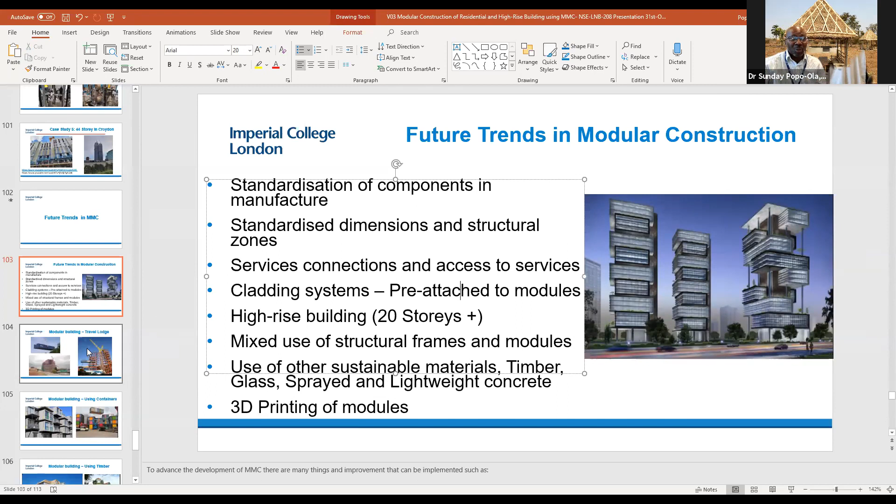The use of mixed structural frame and module - for me, especially Africa, I've been trying to get light steel into Africa for many years now, but nobody's buying it because the material needs to be imported. So if you can have modules built of timber, provided we don't have hurricanes as we do in America, that will make everything go down, or glass, or even spray concrete. You have 3D printing things going on now where they can spray concrete or spray steel, 3D printing. These are all things on the horizon that we need to tap into, we need to start looking at to make sure in 10, 15 years time, our method of construction is much advanced. The aerospace, the aircraft, the automobile are far ahead of construction. So we need to do that.

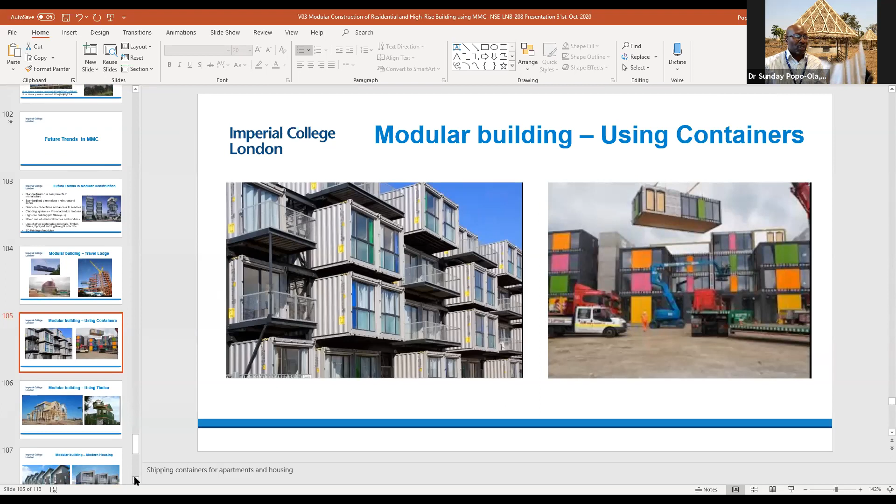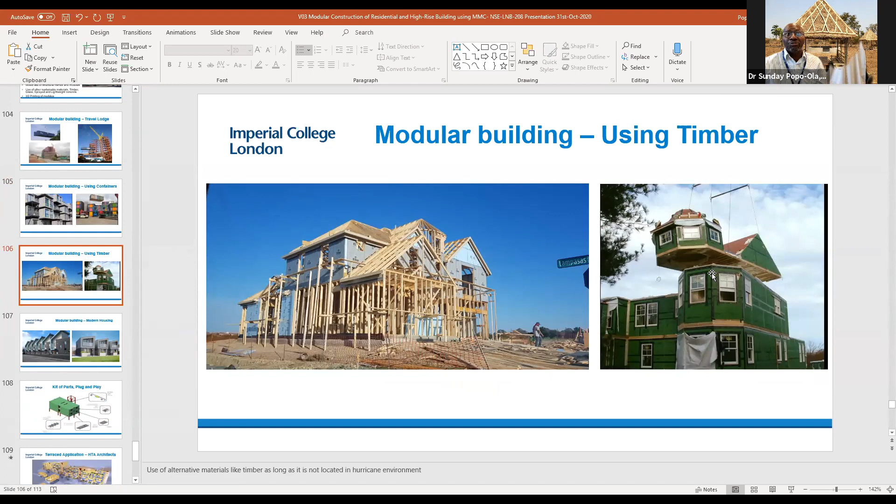As I've said earlier, timber is another area we could look at, provided the building site is not located in a hurricane field, like America. You could get all kinds of beautiful shapes. That's a room and a roof of a timber house right there going up.

Who said modular is boring? Who said modular is not beautiful? I've seen a lot of houses in Lekki and some parts of Abuja that look very, very similar to this. And then you ask them, how long did it take to build it? 2, 3 years. I say, I can build this for you in 3 months. They say, what? I say, yes, I can design and build this for you in 3 months if you're ready to pay the cost. Yes, it may cost more to start with, to build and all that, but if you look at the whole life cost, modular far outweighs traditional. I can prove it to you - I've done it. My house is built of modular and it was seriously done within 6 months.

We have to look at advanced methods of doing things. We have to bring in BIM into it. We have to tag all these materials, all these parts, in case you want to erect them and you can't find the material in the middle of your store. You just click a button on your phone and it will tell you where this box is or where this item is, and you'll be able to locate it very easily. And for repair or maintenance, it's very easy to identify what is going wrong that you need to change over time. So this is the next thing - the next IT, the next data connection, the next Internet of Things that you need to do, or we need to start thinking to progress.

We don't have to wait for Western countries to do this. We can be ahead of them. I was in a seminar, a webinar earlier, and they're talking about Internet of Things - Nigeria and many African countries are really, really ahead on this thing. But they need to do it on a much bigger scale. And this is one application of it.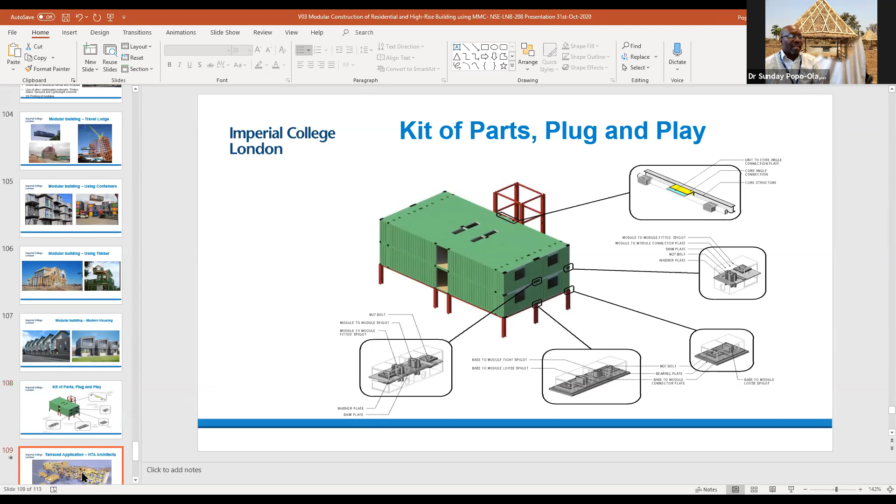As I've said earlier, if you're living in Lagos with a 2-bedroom apartment, and you find the governor isn't taking you seriously and won't let you breathe, you could leave Lagos - this is just an example, don't take my word for it - and move to Kaduna, Kwara State, or somewhere else. You could take your pods, your module, your 2-3 bedroom unit, plug it out of the system, go to another place, rent a space, and plug it back in, and your life continues.

This is a system we developed for London, especially London and the UK. There's something called council tax, and people like to move around because of it. Some people even live on a barge just to avoid council tax. So you could do that - move your house from one city and plug it into another, for as long as you want, then take it out again and go somewhere else.

So that, for me, is a feature in terms of MMC - a kit of parts, plug and play - and there's this idea of moving around because the world is becoming a single place now. You could even move my house from here back to Nigeria.

I saw a school building yesterday - somebody sent me a video on WhatsApp. An old 4-story school building in China - they moved it. They lifted it up on jacks, the jack walked, and they relocated it somewhere else, not far from the original site, because they wanted to use the site for something bigger and better. So yes, this is possible, and these are things we should be looking at as engineers.

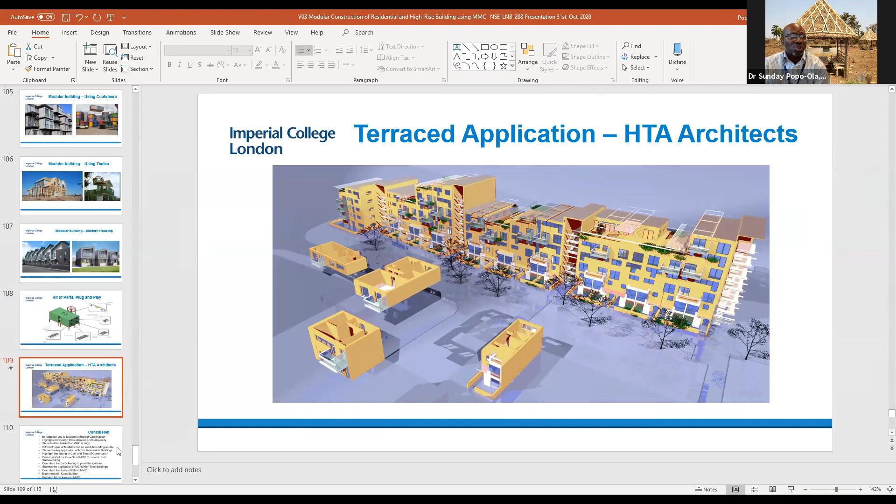Hopefully from my 45 or 50 minutes of talking, I've introduced to you modern methods of construction. I've explained the design behind it, the complexity, the market, what makes people want to use this system, the different types of modules, and what we need to consider in terms of building, transporting, and erecting them regarding weight and all that. I've shown you different applications in residential, and justified the cost and time of construction.

I've also demonstrated the economy and sustainability benefits of this method of construction, and shown you some of the earlier testing we've done - we're still testing now, as I showed with the Croydon connections - and we'll continue testing to improve things. I also showed you the application in high-rise buildings. I think we need that badly because everybody wants to build tall these days. Can modular construction help fast-track this? And the use of beams and some beautiful case studies.

I have far more case studies than that, but I only selected the ones I thought would be relevant to our country - school buildings, apartment buildings, high-rise buildings, private houses. Those are the ones I showed you, but I've got many other case studies I've worked on that I could have shared.

And at the end of today, I've shown you what we need to do to advance this, to make sure we're ahead of it. We don't have to wait for Western countries to show us how to move forward - we should be the ones pushing this further, as we do in banking. Nigeria's banking system is amazing - I have everything on my phone. To do my banking here, I have to log on to my computer or go to the little ATM, even go to the branch. But Nigeria is so advanced - the moment money comes in or goes out, boom, you get an alert.

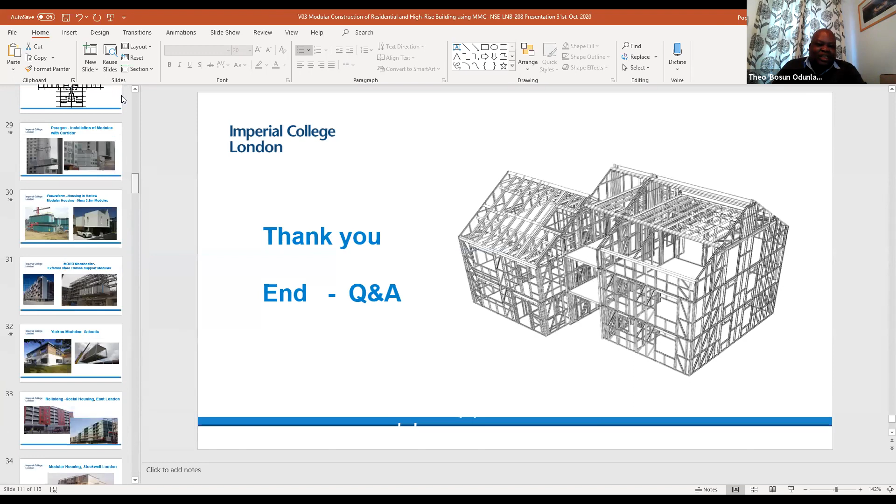Congratulations, sir. Katanga, thank you very much. Well done, sir, you have done well. God bless you. That's awesome. That was awesome, thank you very much. That's great. Thanks, Dr. Popo-Ola. Thank you, Dr. Sunday Popo-Ola.

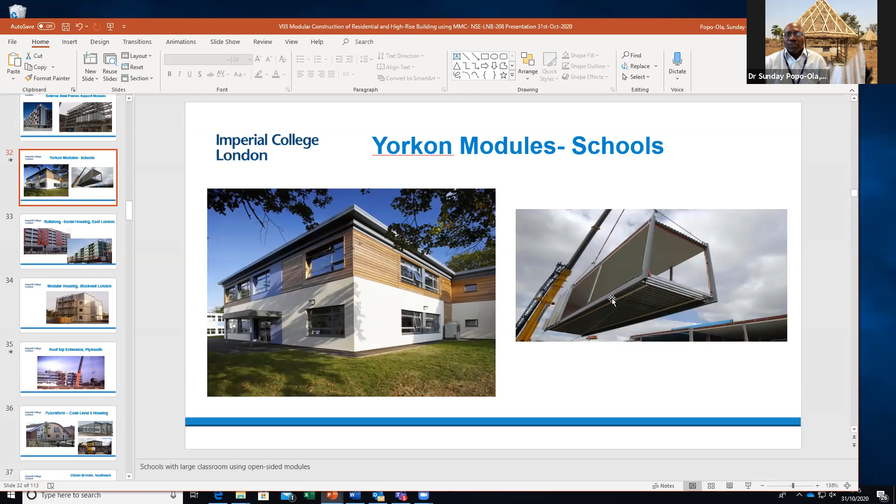Can you see this column in the middle here? On the other side, it's not supposed to be there - that's a free space. But because of transportation and lifting, we have to put that in there temporarily. Someone might say you're wasting material, but no, it is important that it stays there. Otherwise, the floor could bend - all kinds of things could happen during transportation. So we make sure we do things like that, even though the road is not good, you design your module to cope with a bad road if necessary, because that reduces the damage you're going to get at the end of the day.

No, you've answered my question. I just want to be sure that we take account of the peculiarity of the Nigerian environment, and this may eventually push up the cost.

Yes, indeed. Like this one, we even cover it up in case of rain as we're transporting it. And then you make sure the gantry system, the lifting beam, is parallel to the module - instead of lifting at an angle for some modules which are very long, you lift them straight so there's no bending in the module. You could see this was actually designed just for this module, so it's lifting vertically and the whole thing is not bending.

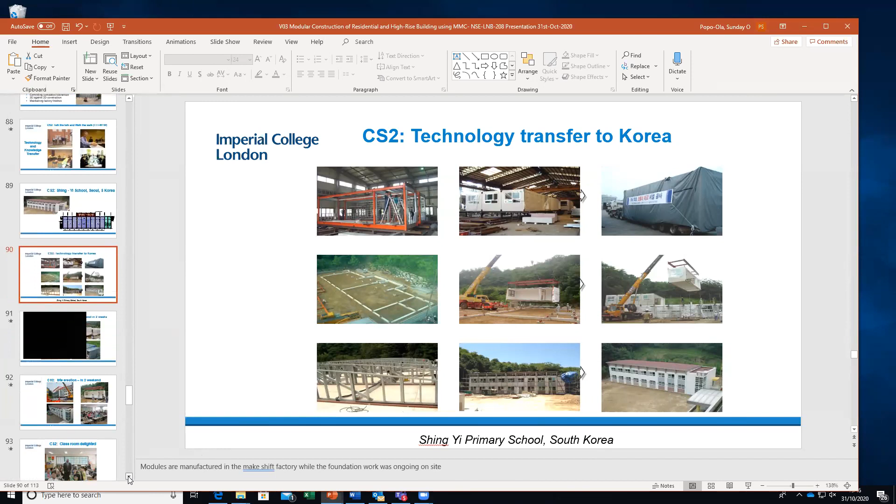Thank you for the answer. I think it's fine because I just want to be sure we understand, because this technology is familiar in the oil and gas industry, that when you lift, you preclude bending. But for Nigeria, we are aware that if this technology is to be adopted, there are additional engineering considerations that are maybe peculiar, not unique, to the onshore industry. Thank you. Yes, yes, thank you very much for that.

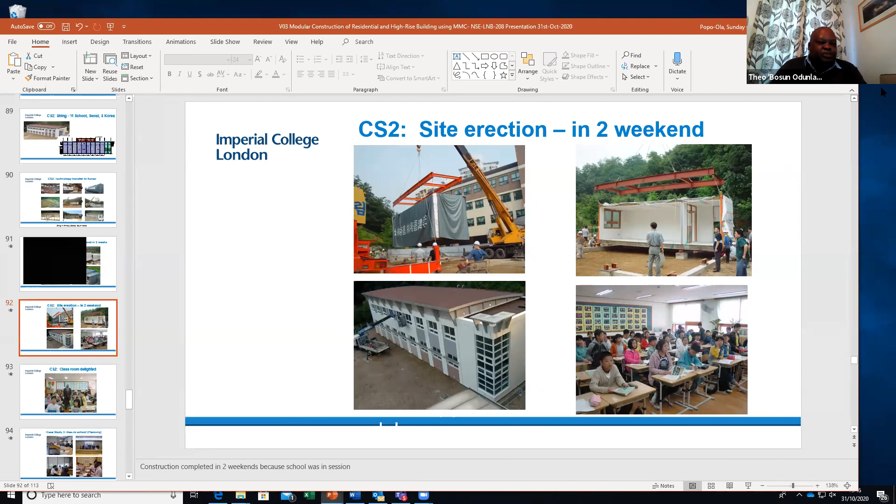I've got one for Engineer Patrick Obidoyin here. He says thanks for the presentation, and would like to know how do we take care of the services - electrical cabling, plumbing services, mechanical M&E - in the design, and also what is the maintenance regime for modular buildings? And also, what is the typical lifespan of modular buildings? Over to you, sir. Right, thank you very much.

Services is seamless because everything is done off site. Your pipes are tied together, connected, and checked on site. Your cables also just come to site and plug into each other. We design plugs and devices that connect all your electrics together from one module to the other, and also connect all your piped services together from one module to the other, and then onto the main. One thing we do with services: we try to make sure all our services go to a particular part of the building - the vertical trench of the service goes through a particular part - so if there's any problem, you know where to go to check things out.

Maintenance regime, as I've said, modular has very interesting, very low whole-life costing. A traditional building, within 6 months, something will have gone wrong and you have to call maintenance to come check. Modular, because it's been tested, improved, and released, maybe in about a year or two afterward you start getting something. And again, if you do get something, it is very easy to fix - it's not something so difficult that you won't be able to get access to.

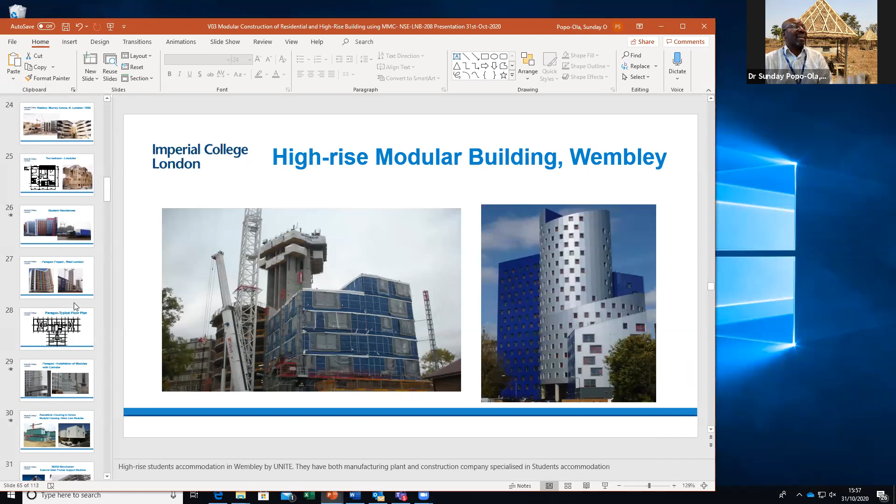But the module, there's nothing wrong with it. That building is not going to be taken down, they're just going to replace some of the cladding. There's a hotel in front of this building, one of the famous hotel chains, not Travel Lodge. What's the other one? Starts with a P.

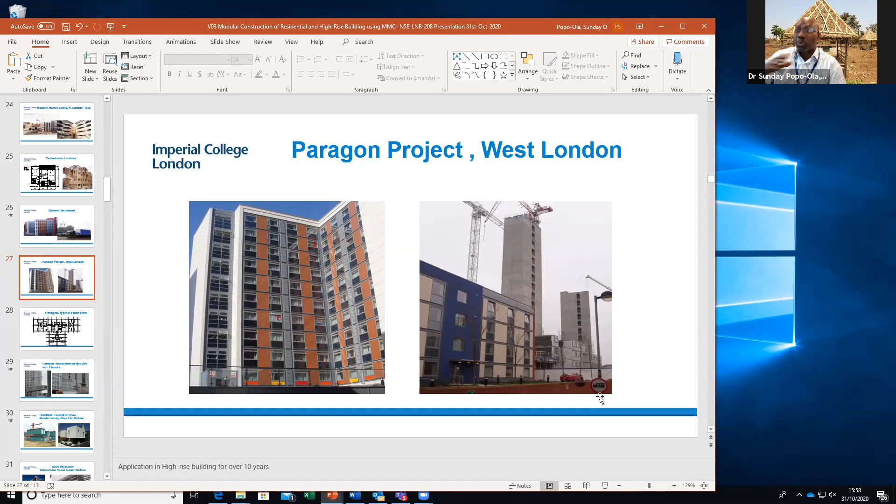There's a hotel in front of it - if you travel along this road, Premier Inn. The moment Grenfell happened, they changed all their cladding instantly, and I advise them to do so. Not just here, all the Premier Inns used that kind of cladding. They've gone and spent money and replaced it all. How come this particular building hasn't been done? Is it above me? Thank you very much.

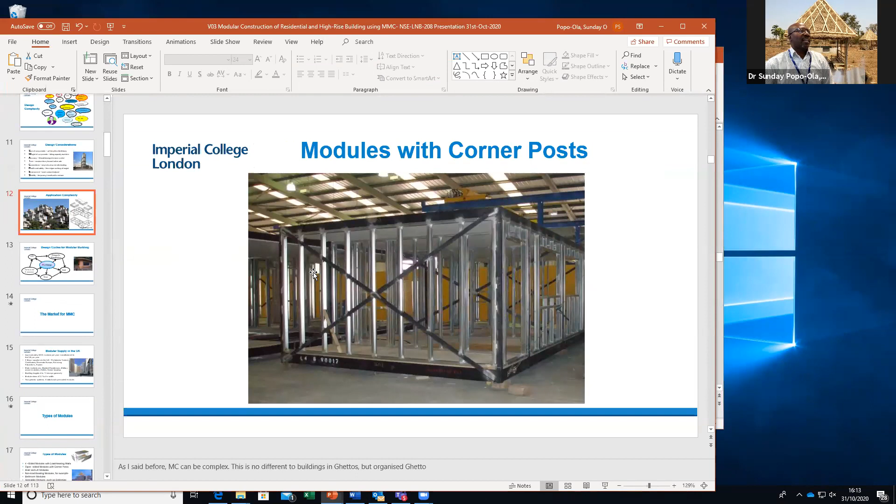I'll show you a building earlier, which is like a ghetto, in the middle of nowhere. We've seen people building houses on top of a hill using the traditional method, so if you can do that, I don't see why you can't use modular. It may have to go in 2D panels and then be put together rather than as a complete module.

The building you see behind me, the tent, the whole roof was constructed on the ground and lifted up. That's my contribution to my village in terms of modular construction. I showed them how to do it, and they did it.

On material, yes, we have Ajaokuta still, whether operating or not. The Russians came, the Chinese came, everybody bought their little bit and ran away with it. As long as we have something like that, and Nigeria is full of resources that we can use to produce steel and all kinds of material.

Look at how wonderful Dangote is doing with his cement, and every week the cement price is going up by 50 naira. The last time I bought cement it was 3,100; two to three months ago it was 2,500. So it's about consumption, there's a market for it.

So if steel manufacturing is good in Nigeria, then we'll start making use of it. There's no problem with material.

It's there. Currently, if you want light steel gauge, the closest you can get to, apart from going to other countries, is South Africa. They have big manufacturing plants producing this. So people buy them for that, and people use them in Nigeria now for cladding, partitions, and all kinds of things. I've been to a factory in Lagos where they have machines to form all these sections.